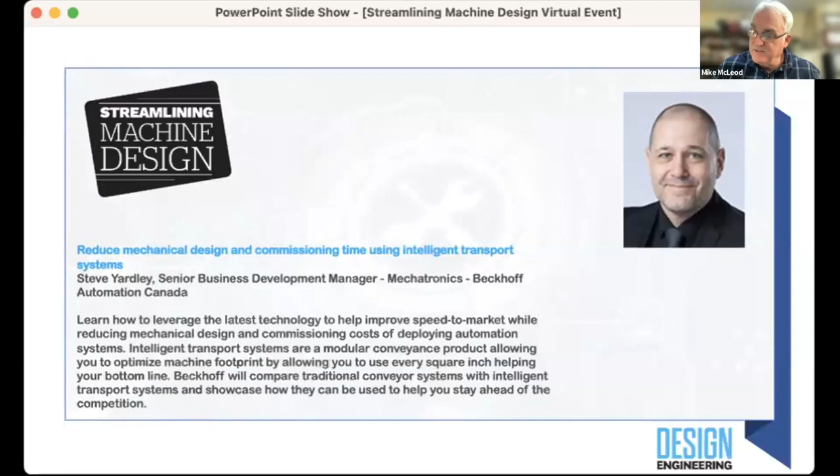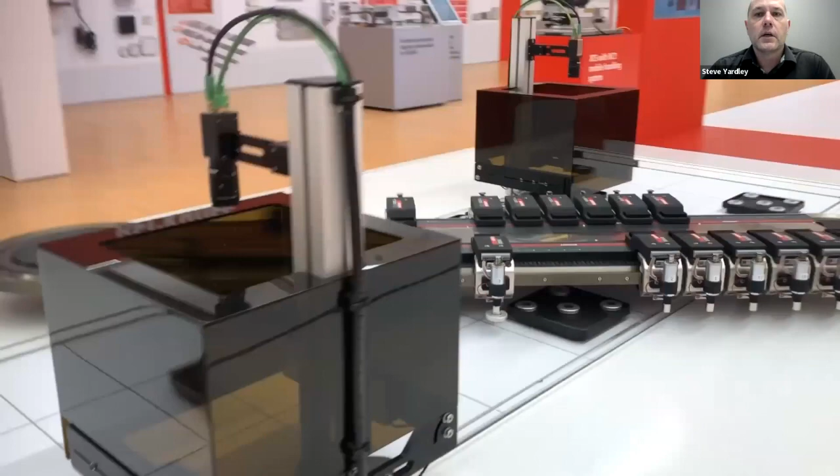Thanks, Mike and the design engineering team for the opportunity. My presentation will approach this topic in a slightly different way by looking at the specific technology and how this can help streamline the machine building process. By the end of this presentation, I hope to have provided some insight based on a number of real-world application examples. So let's begin.

As I mentioned, we're going to be talking about technology and how the next step in intelligent transportation systems, such as XTS from Beckhoff, can help streamline your overall process through design, build, commissioning, and qualification, reducing the time to revenue generation and production with the use of standard proven modules and assemblies, plus how to reduce some of the other challenges found in modern production. Let's start by looking at some of those challenges faced by manufacturing in 2023.

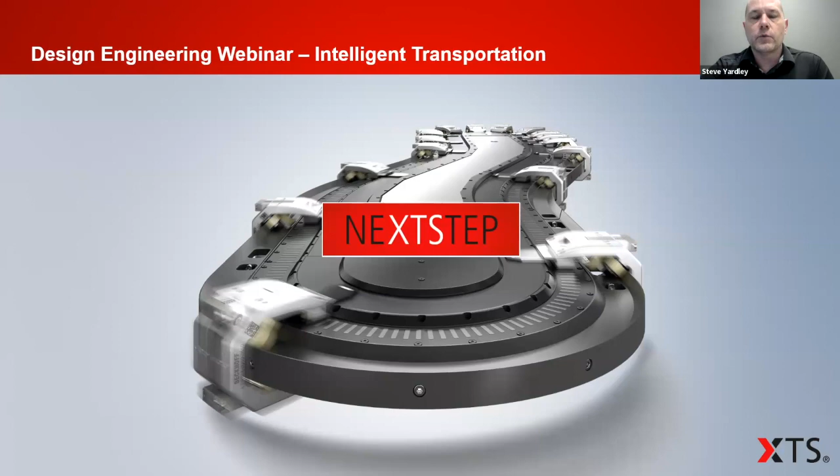Post-pandemic, there's been sustained growth in the manufacturing field. Momentum gained emerging from the pandemic has exceeded expectations, and we're seeing a number of different trends. Organizations understand the need to keep up with technology changes and are investing in advanced and emerging technologies to increase agility. Labor continues to be a huge challenge, finding ways to address the labor market to add and retain the right talent. Flexible automation is a key solution to the labor shortage, automating where practical.

Recent events have exposed weaknesses in our supply chains. Manufacturing is facing serious productivity challenges as organizations look to address the shortages, in some cases looking to reshoring and local or in-house production solutions. A topic really on trend is smart manufacturing, smart factory, intelligent transportation, the internet of things, and connectivity as the industry continues into Industry 4.0. End users recognize the enormous value of production quality and engineering data acquisition and analysis. A big change is that these end users often now take it upon themselves to undertake the R&D projects and feasibility studies prior to engaging machine builders.

So there are many challenges faced by all manufacturers in 2023. Manufacturers will see this as a critical year as they tackle global logistics backlogs and cost pressure, coupled with other concerns due to inflation and the uncertainty of the economy. This list is not exhaustive by any means, but a snapshot of some of the key areas where effective use of advanced and emerging technologies can make a big impact. My goal here today is to demonstrate how deploying intelligent track systems can help solve some of these challenges.

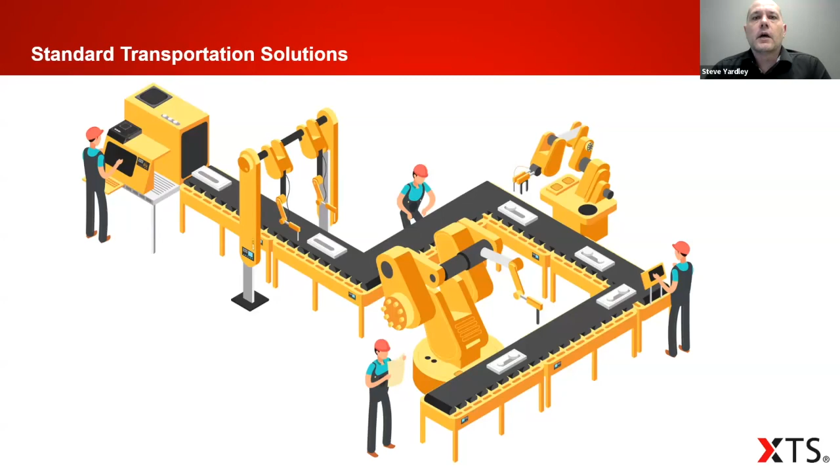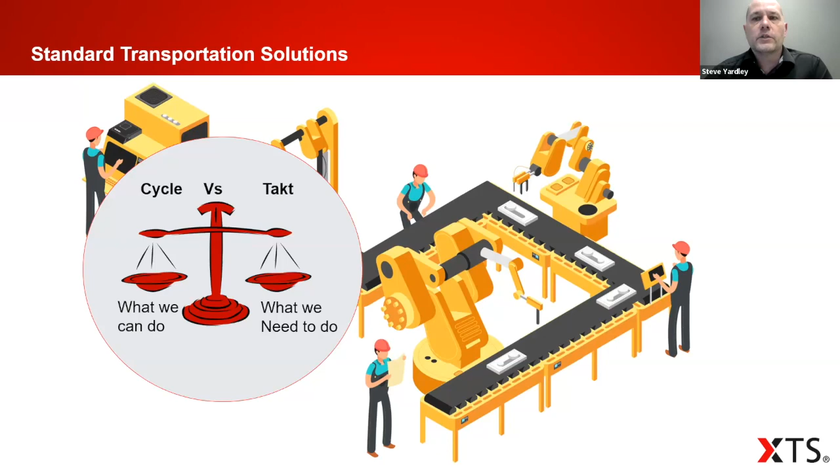Typically, the bottleneck is the transportation solution, limited by the best cycle time that can be achieved by using the technology and the process time combined, rather than the takt time, which is more important as it's driven by the customer demand. In many cases, the reason for the focus on cycle time is due to the time it takes to transfer the part between the stations and locate it, rather than the value-added process itself.

Cycle time is determined by the process, what can be produced in the given time, plus how long it takes to change over the product, which in many cases is increased due to the limitation of the transportation solution selected. Whereas takt time is based on producing what the customer demands within a given time.

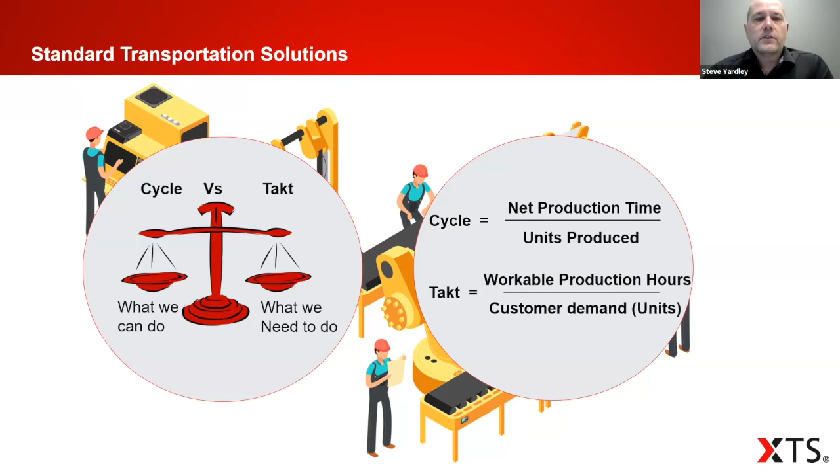To balance cycle and achieve takt in many cases, multiple additional fixtures on a traditional solution are needed. So more tooling, heavier weights, and larger footprints can be the result, meaning more floor space, more automation, more work in progress, more overall cost. By selecting an intelligent transportation solution, however, the time between stations and processing can be optimized so you're not limited by the slowest process.

And there are many forms of transportation to choose from that can be used in manufacturing: dial tables, precision link conveyors, pallet-based systems, plastic chain conveyors, walking beams, and so on. Each of these solutions has its application, but they're very limiting. A dial table, for example, is a fixed process time, one direction, with the slowest process setting the cycle rate.

For a modular pallet-based conveyor, the largest challenge is the time it takes to move from one station to the next via different space and time consuming transitions. Then the need to stop and position the part prior to the processing operation beginning. This is all taking up valuable time and space.

Each one of these solutions takes time and effort to build and integrate. Both mechanical and electrical design is needed, and in many cases, additional components such as sensors and valves must be added, which someone must figure out how to mount and how to control. This diagram really sums it up. No matter how fast the robots or operators or automation, the limitation is the transportation solution.

Traditional solutions often come with traditional problems, but many organizations continue down this path as this is what they've always done. These are the most dangerous words in manufacturing: we've always done it this way. Utilizing new technology such as intelligent transportation systems is the future of manufacturing, the ability to rapidly deploy, adapt to changes in production, volumes, variants, etc., while ensuring maximum OEE with minimum impact on the floor.

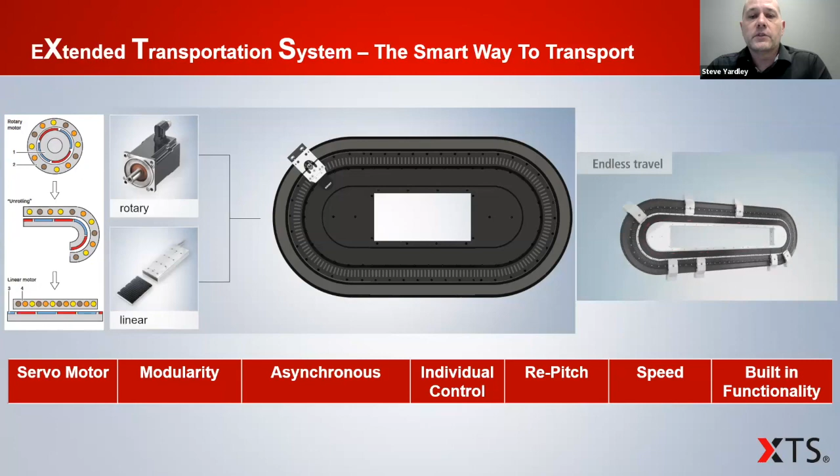Finally, having available built-in software functionality such as collision avoidance, jerk reduction, automatic accumulation, various motion profiles, easy connectivity via the industrial PC for all major interfaces, insightful diagnostics, simulation capability and visualization simplifies control design, meaning custom code is not needed for these functions. There's a lot of benefits to be had from this one piece of the automation puzzle. Utilizing better automation will allow you to build better automation solutions and help to simplify the overall investment and implementation time.

Making a comparison between synchronous and asynchronous motion. Dial tables generally operate in a synchronous motion. Stations on a dial must be at a fixed pitch, fixed speed, fixed direction. This means that the overall cycle time is driven by the slowest process. If you multiply the slow stations to aid cycle time reduction, then the knock-on effect is each set of tooling must pass through each station and wait whether it needs to be worked on or not for the duration of the cycle time. This can also mean unneeded additional tooling, duplicate stations, blank stations, extra floor space, extra cost.

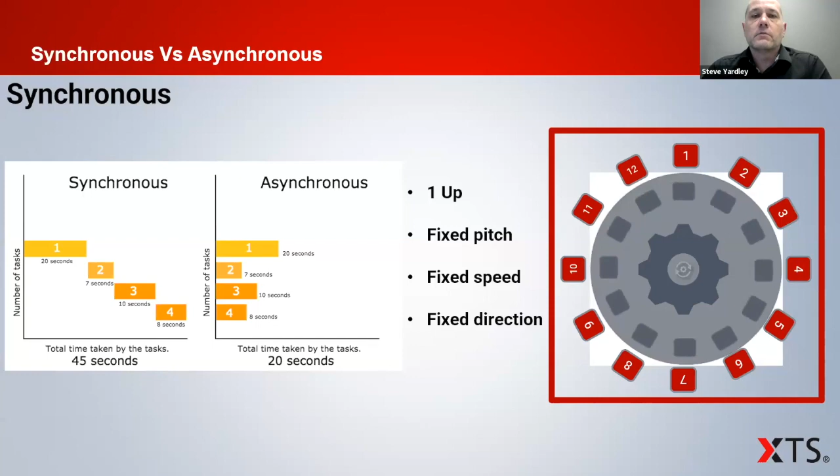Asynchronous motion enables higher throughput and flexibility. Intelligent transportation systems can operate asynchronously, synchronously, or a combination of both, which is determined by the application process. Here we can see where the solution was realized by utilizing the mover's individual control and ability to repitch as required by the process. So going from 1 up to 2 up to 5 up, and then back to similar pitch sizes as dictated by the process and the cycle time requirement.

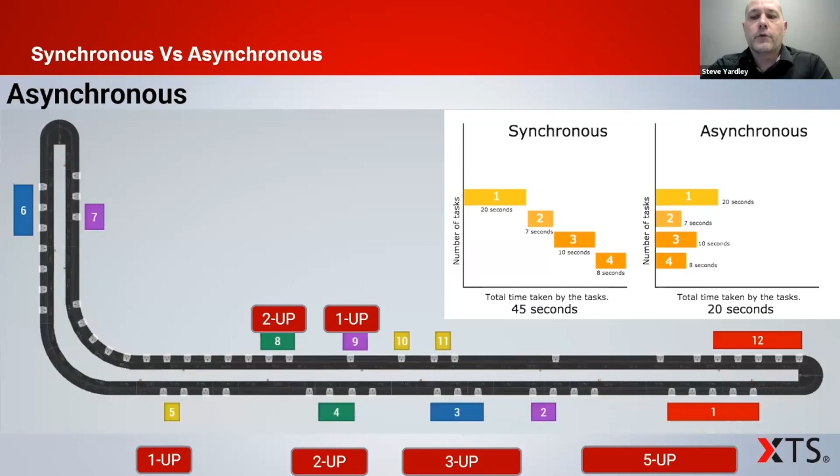Servo motion allows full configuration of velocity and acceleration. High velocity and acceleration means reduced transportation time, while low acceleration can help for sensitive and unstable or fluid parts. Low acceleration and low velocity could be used for a curing station, for example. This enables high overall machine throughput.

All of these capabilities and features allow huge reductions in custom engineering, design, and custom code writing, allowing the specialists on the team to concentrate on the areas where their skills for creating custom equipment are best used, rather than on the basics of transportation, which is used to connect these islands of automation.

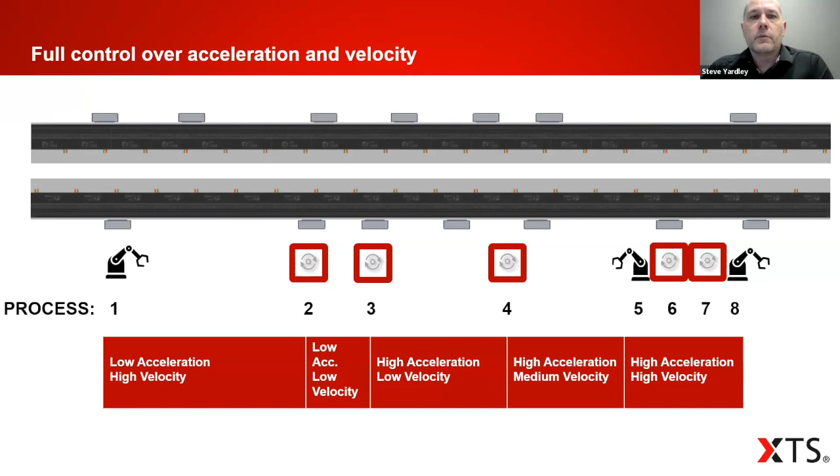The bidirectional nature of a servo motor allows not only for speed and acceleration control, but also direction. So you're free to use the mover as an additional axis, saving on automation and complexity cost. An example here, a print head. Having the ability to send the mover backwards and forwards allowed this customer to define the exact number of passes required in this printing process.

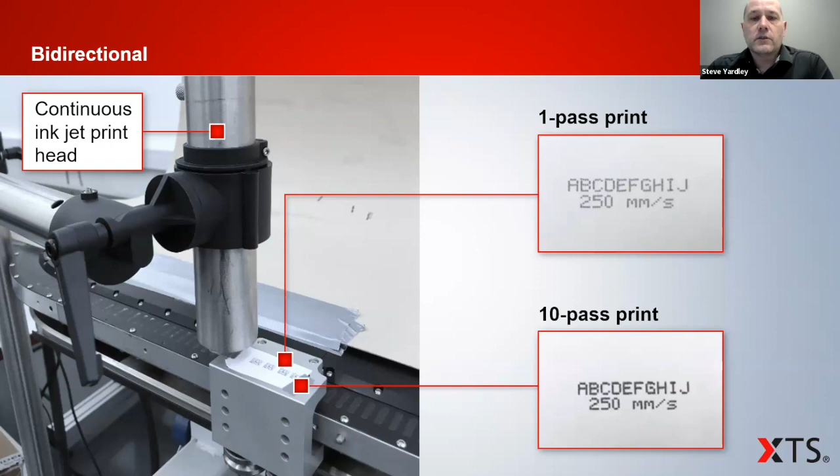This was only using the feedback from the XTS system. No additional reference measuring system was needed, nor were any additional servo axes required. This saved space and also capital cost.

So let's talk about floor space. There's a demand for production facilities to make a variety of different products and to switch between them more often. It's not typical to make tens of millions of the exact same product these days. Batch sizes are reducing, form factors are changing, packaging materials and methods are changing, and it's not practical or possible to build a new factory for every new product.

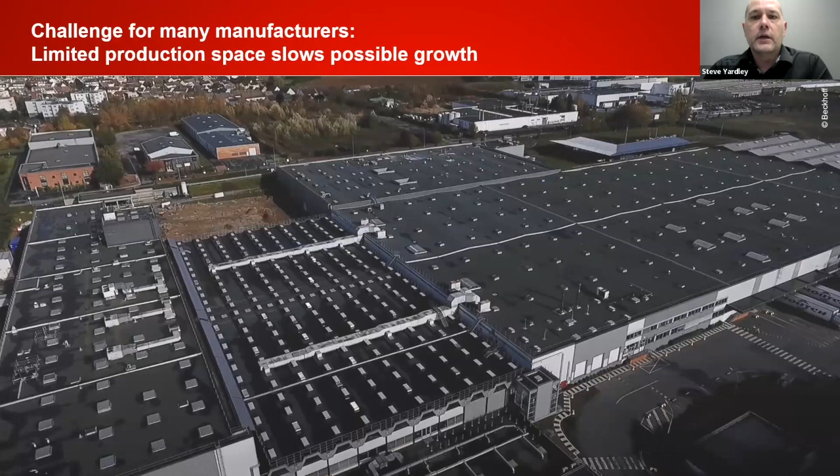Expanding production facilities is expensive and not always possible. Land purchasing, zoning, permitting, construction, it all costs time and money, and there may not even be any space to be able to expand. Getting more production out of existing factories is critical and a lot less expensive. With technologies like XTS, we can pack more production into a smaller space.

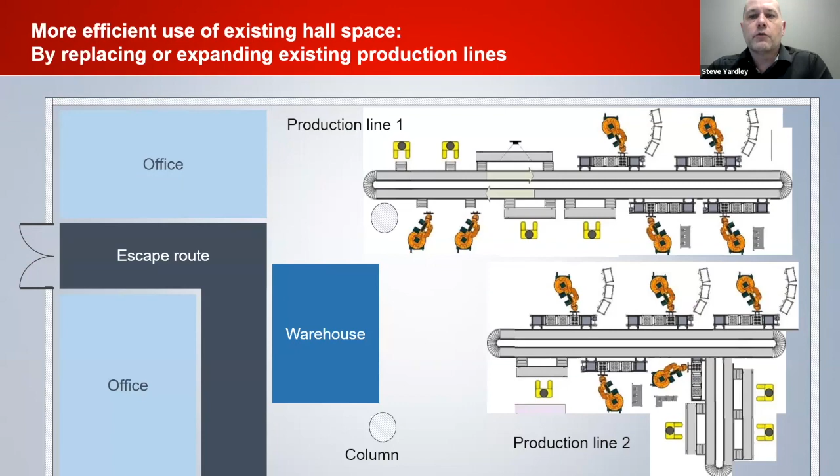We can look here at a use case. There was a need to expand the production capacity of an existing machine, but there were several hindrances: warehouses, pillars, escape routes, things that either can't or are difficult to move. A more efficient new machine was sought to give more flexibility, having the ability to produce different product formats with one system and to increase throughput. This would give the end user an increase in revenue per square meter.

Buildings often become a challenge when installing new equipment. Traditional solutions used up way too much floor space, had too much wasted motion, and weren't flexible enough for the customer needs. Having a transportation system with modular building blocks for straights and curves with inside and outside geometries offers huge flexibility of layouts, ensuring any challenging features such as the building columns can be designed around and the available space maximized.

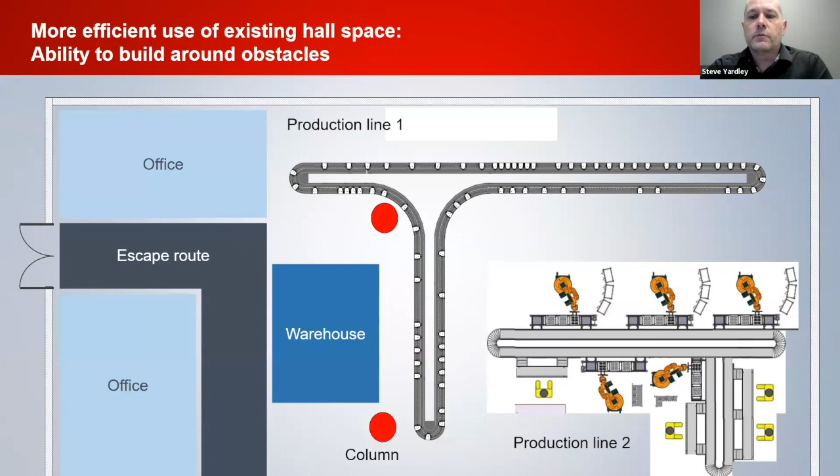For example, the products being produced may be similar in design, but with some slight differences or customization. So variant 1 must pass through all stations. Variant 2 only needs to visit 7 of the 10 stations, and so on. It's possible to have these different variants running on the line at the same time and not impact the functionality, giving the customer maximum production flexibility, enabling them to use their capacity as desired.

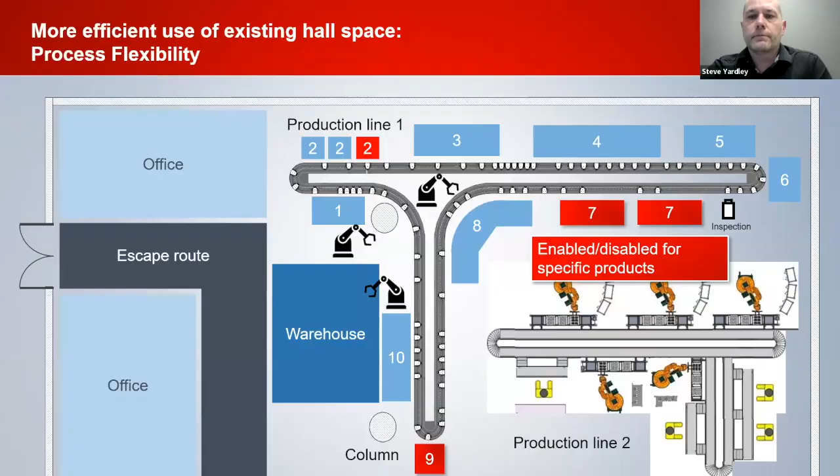Let's look at a customer example and installation. Geffersoft makes diffusers for airbags, a safety critical part for your vehicle. They deployed an XTS for optical inspection. This optical camera inspection is slow. 11 individual processing stations examine these critical parts down to the micrometer level.

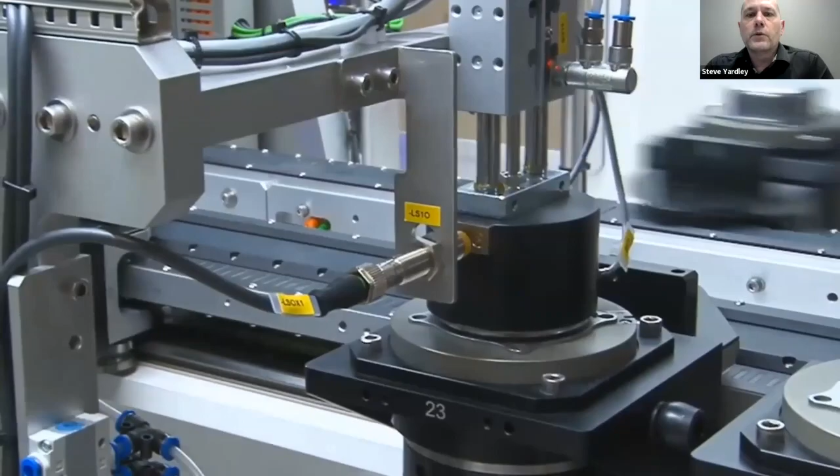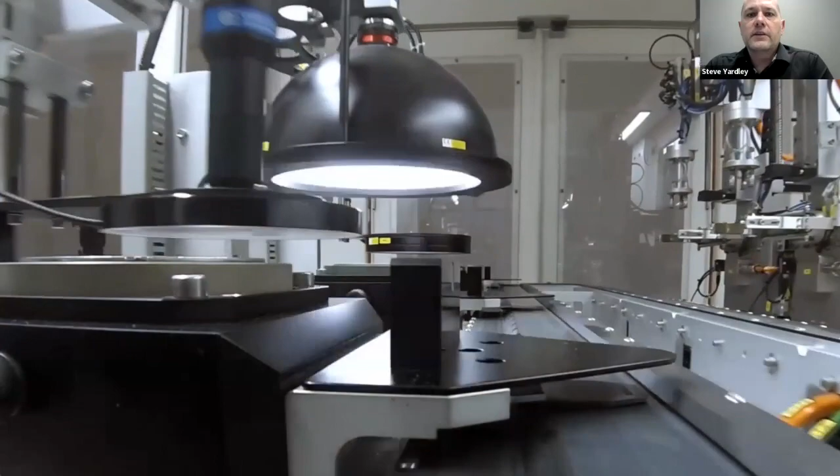Individual motion of the movers allows for multiple individual test processes to happen in parallel, meaning the throughput is no longer determined by the time-intensive optical process, so the faster test stations can be used sequentially, allowing optimal utilization of the assets. As a result, the 2-second cycle time requested by the customer is reduced.

The optimization of the stations also enabled a reduction in stations needed, so the machine acquisition cost and floor space were both reduced as a result. In this case, the floor space was reduced by 40%.

The high speed and position accuracy of the XTS system even allowed for some additional capacity to be available, which can be used for future expansion for any additional inspection tests or to further reduce the cycle time, therefore adding security to the investment made.

A modular system will allow mechanical designers to create the layout demanded by the application environment, not by the limitations of the equipment. Not only do you have to consider each process, as we just saw, the available space and objects such as pillars impact layout. We've already observed a straight line doesn't always work. Having the ability to configure the track as you require based on the floor space is key.

XTS is a great example of this, using a small number of modules to build up your system, starting with the straight and curved modules with different rail solutions depending on payload, complete with matched movers. This solution is completed with an industrial PC utilizing TwinCAT. This control system, based on an IPC with simple connectivity, rounds out a user-friendly modular system.

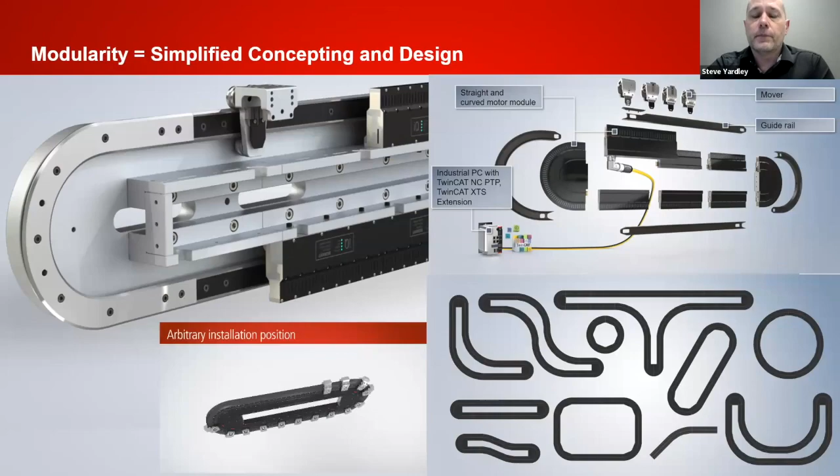Modularity and flexibility were two of the key aspects for L'Oréal selecting Beckhoff and the XTS system for their F24 production line, which was realized by French integrator SICAP. This line was used to produce over 55 different variants of foundation, having bottles of different types and shapes, plus having many different styles and colors of product. The ability to switch production in seconds based on the customer demand was critical. This system replaced 5 of the machines and gave floor space savings of over 30%.

L'Oréal, being an international organization with manufacturing globally, saw that the modularity and standard design from a proven solution available globally gave them the ability to replicate this in other countries to suit their local needs. This system was 22 meters long with 40 movers. It performed several different tasks, including bottle infeed, filling, attaching the pump, cap and label, with full transparency over the quality of the product. This solution fitted L'Oréal's vision of innovation and quality and increased their flexibility in production.

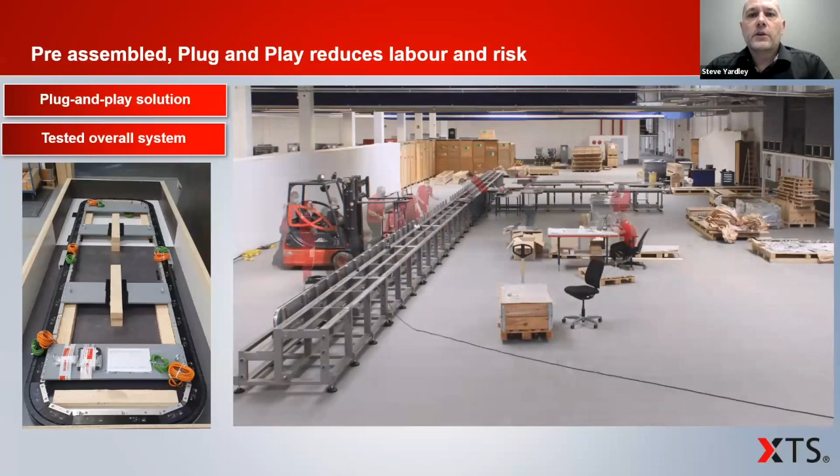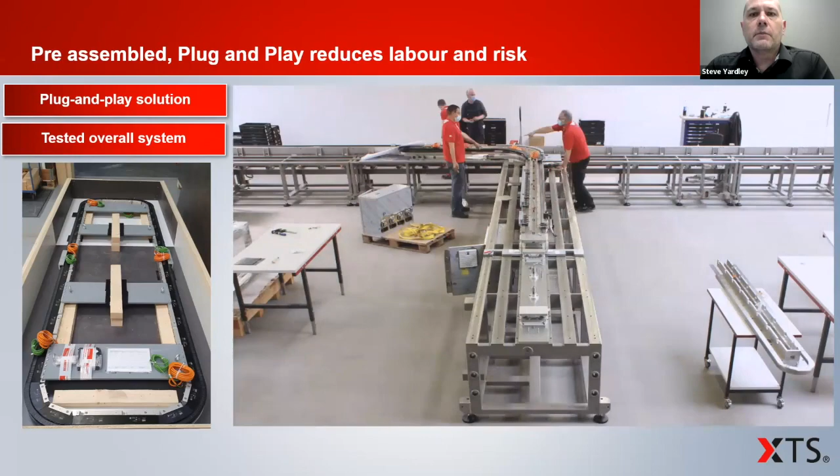Beckhoff then makes your life even easier. Taking time to understand your needs, we build on modularity with a proven plug-and-play solution which enables simple and fast project implementation. We pre-assemble and test this system for you, which then reduces potential sources of error and simplifies project coordination. Using this proven solution, which has been deployed more than 2,400 times in the last 10 years in a wide variety of industries, enables users to piggyback on the experience and risk reduction, given the ability to calculate costs thanks to an easy integrated overall solution. The benefit is that this allows you to utilize your labor and other resources in your specialized areas of expertise.

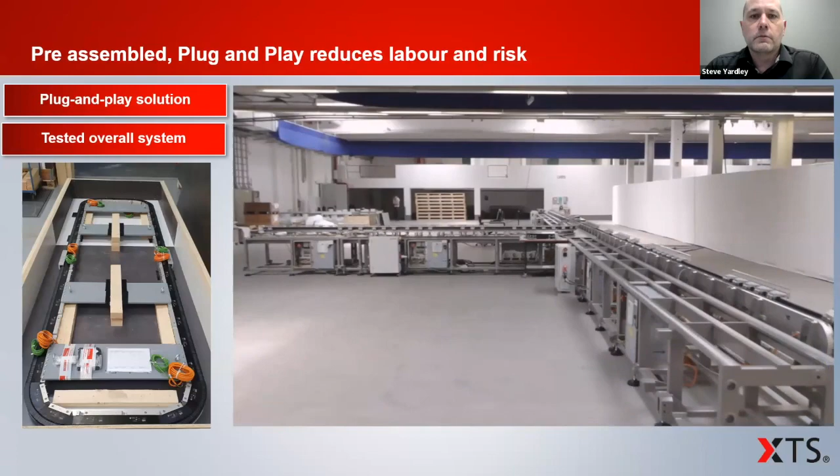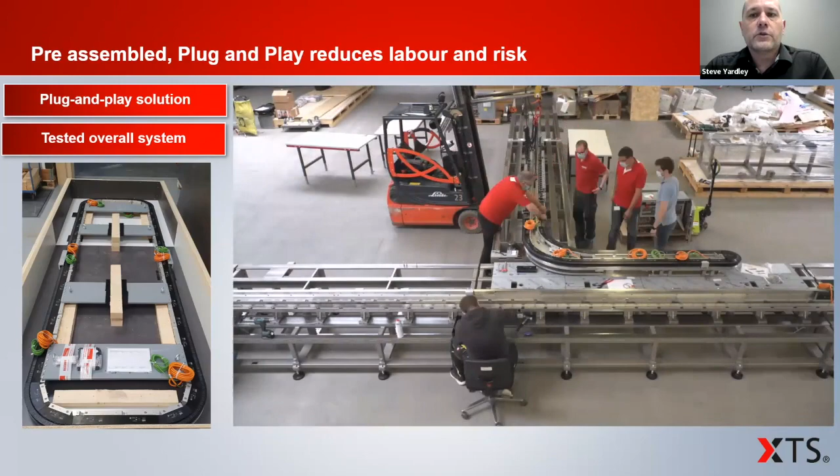Here we can see an example that was pre-assembled and tested for a customer in the pharmaceutical industry. It's a large system. This is only part of the entire line. One machine with 15 XTS systems and over 400 meters of track, complete with over 1,500 movers. The simple and fast project implementation reduced potential sources of error and allowed the customer to work in parallel on their custom automation. The customer provided the base frame structure details, which was designed around a combination of the transportation solution and overall machine design.

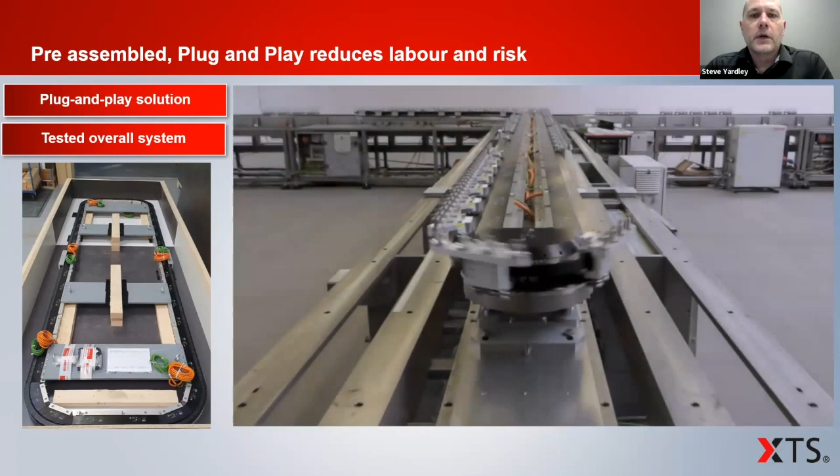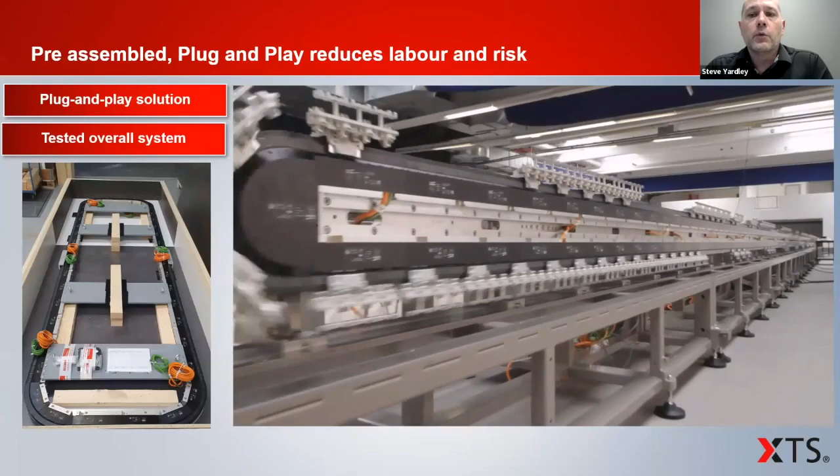Consultation ensured all shipping breaks were exactly as desired. Mechanical assembly, complete electrical cabinets, functional testing prior to shipment gave the customer the ability to work in parallel, knowing once the transportation system arrived, it would fit and function as expected, speeding up the overall implementation time.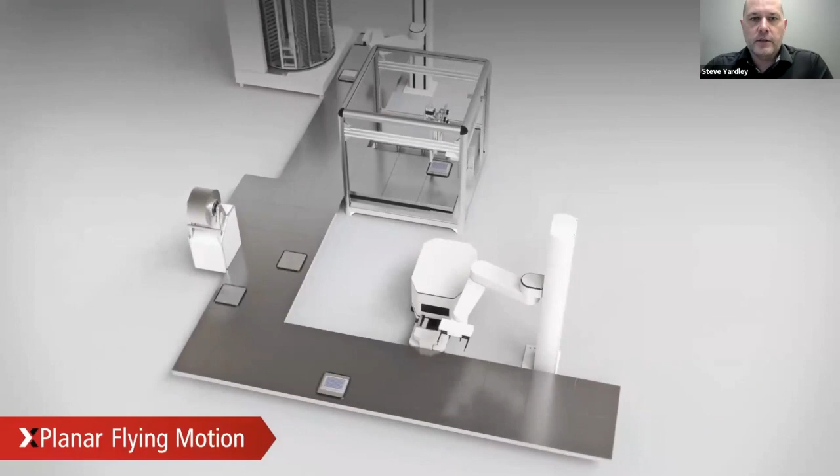Could it be even simpler? Of course. A modular concept with the ability to adapt quickly as manufacturing changes. Giving an organization ultimate agility, this concept uses the emerging technology of planar technology. Having 6 degrees of freedom and utilizing modular tiles that are used to create a path which the movers can travel on. Adaptation and alteration is quick and simple as needs change. Literally throw down tiles where you need the movers. It's simple. This is tomorrow's technology today.

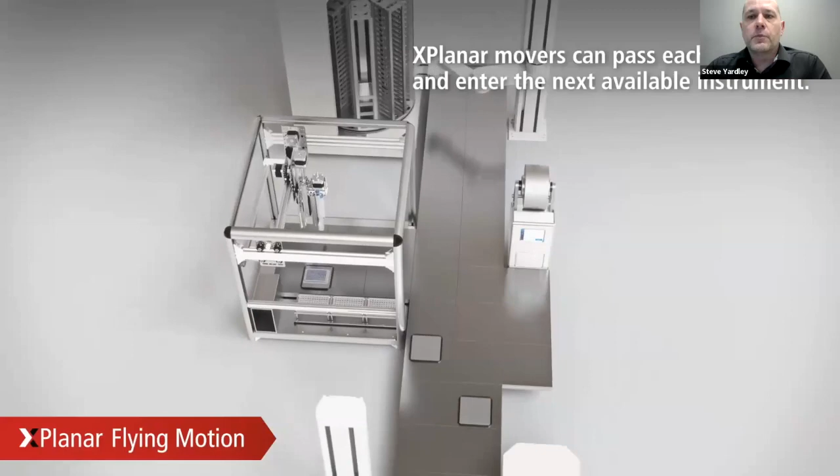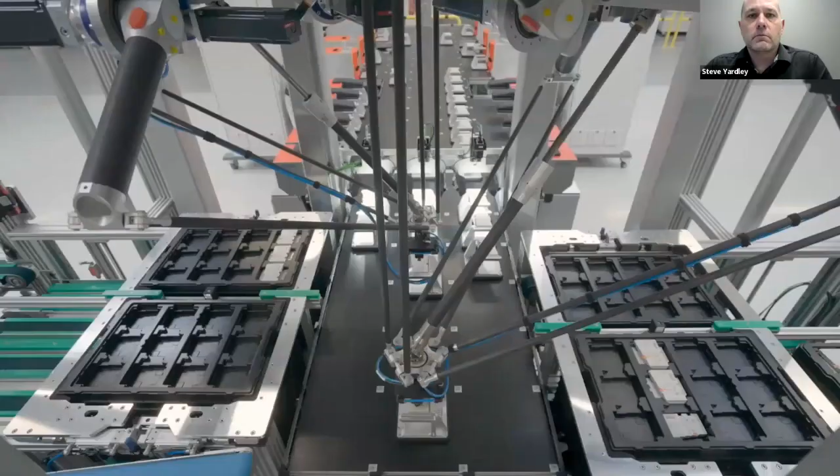And this isn't just futuristic technology. It's being used right now as part of our own production for bus terminals. This is part of a critical production process as these products make up a large percentage of Beckhoff's annual revenue. The XPlanar is used to link stations. Starting with picking from a tray, the camera identifies the serial number. The mover is then sent to the programming station and the specific program is flashed based on the serial number. It then goes directly to the test station.

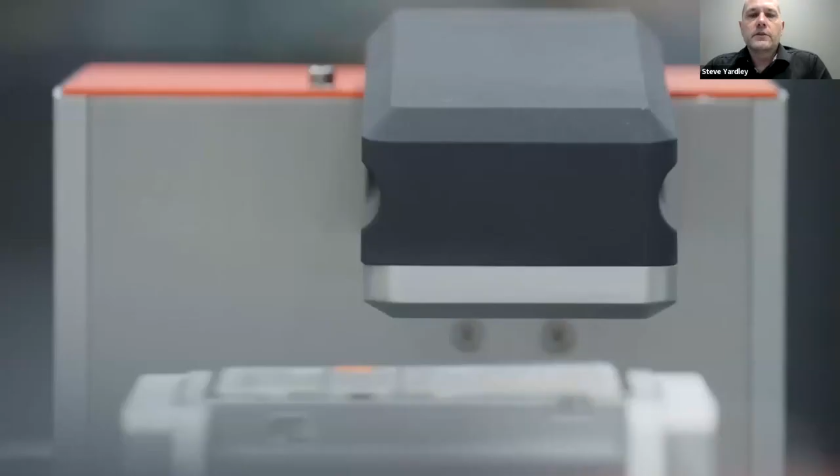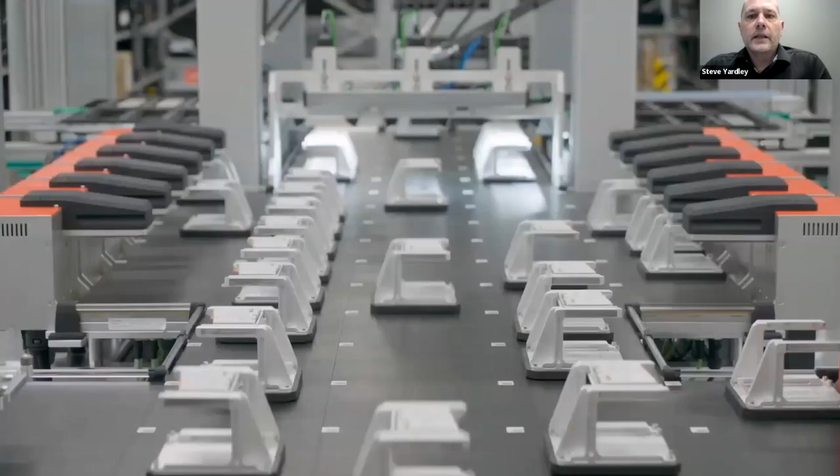The 2D movement allows decoupling of flow, so if a longer test cycle is required, it doesn't affect the other modules in production. Having 6 degrees of freedom, XPlanar replaces the need for additional handling units, such as when handing over to the test cell, the vertical movement of XPlanar performs this function, so an additional axis or robotic device is not required.

Let's talk about some digital tools and IoT on a really high level. Specifically for automation, digital twins can be used to improve production and process and are being used in all types of industries to help enhance complex projects. Digital twins, which are a digital representation of a physical object, are exceptionally helpful for simulating manufacturing lines in the development stage to help support development of production systems. This helps to shorten time to production, increase flexibility, aids optimization and performance improvement.

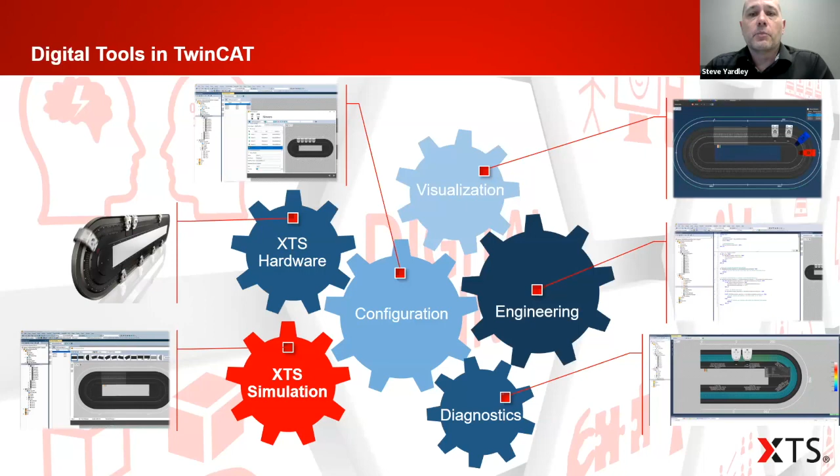For example, digital tools made available by Beckhoff's TwinCAT running on an industrial PC include project planning tools, which allow you to check many issues without a single piece of hardware: sequential control, power consumption, production rates, bottlenecks, and so much more. Integrated XTS simulation functions also facilitate plant design. They enable the user to assemble any desired track layout from the XTS modular system, to check the subsequent integration into plant concepts, and to verify application sequences.

During the development process, all parameters such as track layout and number of movers can be adjusted as desired until the optimal solution is obtained. The generated program code can then be reused for the physical hardware. This significantly speeds up the plant design, configuration, commissioning, and reduces the time to market. This is an example of how Beckhoff simplifies the project planning of XTS applications with a software toolkit already included with a range of functions.

A tool window summarizes all components in a clear display and is the central point for the user to be able to complete all the different functions. Using the configurator and software builder, the user is guided through the setup of parameters for the application with visual support. After only a few minutes, you can see the movers starting to go around the system, either on the hardware or in simulation itself.

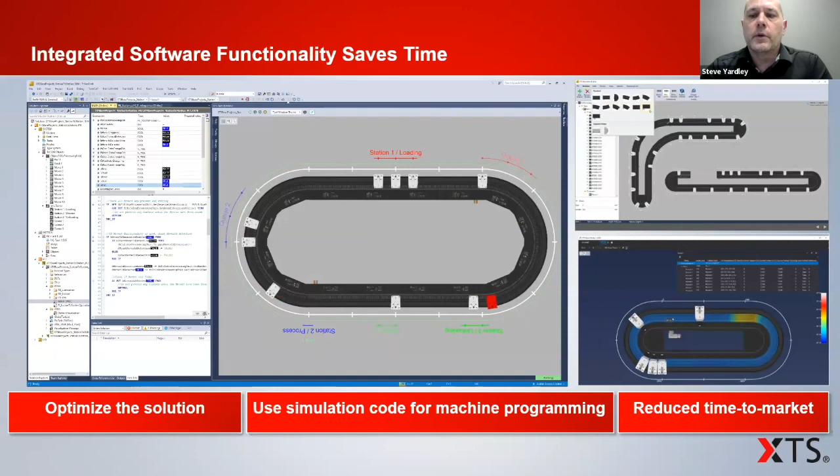Having an industrial PC-based control offers several benefits, such as reduction of cabinet space, typically by 50%, less panel space by 40%, and less cabling is needed with deployment of Beckhoff's IPCs with EtherCAT. There's a reduction of integration time, debugging, reduced complexity, and reduction of labor doing repetitive tasks. Everything is designed for reduction, either in physical space or time to design, assemble, and debug.

This simplifies the integration of PLC, motion, HMI, safety, measurement, vision, and IoT, all by using one software on one CPU. There are many options of IPC to suit the application based on the complexity and how many cores are required, with the options of embedded, panel PCs, or HMIs. Being a PC, all interfaces are available for additional ease of integration and connectivity, such as EtherCAT and Ethernet. PC-based control means data is available centrally, such as diagnostics and predictive maintenance, giving real-time coupling between the process and hardware. Being a PC, it certainly makes it easy to connect and address the IoT challenges.

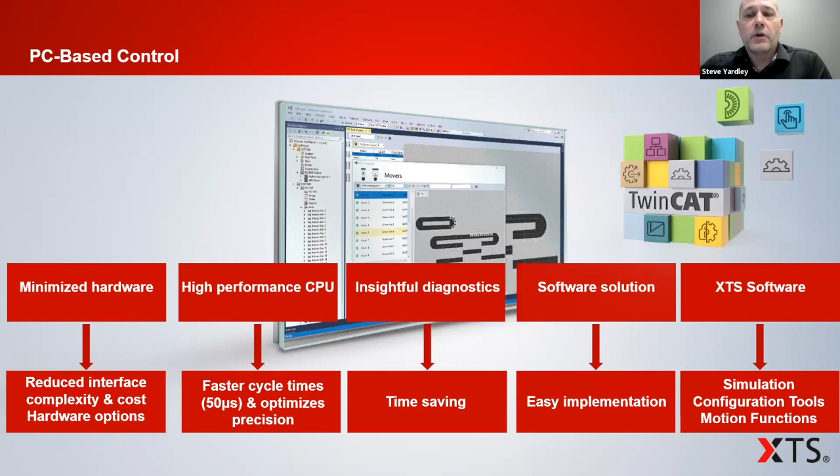So we've explored, by looking at some real-world examples, how intelligent track solutions can help with a number of these challenges. Labor is addressed in several ways. In design utilization, the modularity of the design and software functions, such as simulation and virtual commissioning, and then also for the end user through optimization of processes, help to ensure labor is deployed where it's best used. Floor space constraints are first addressed by using the building block modularity, fitting the solution to the available space and required automation, and then optimized once again with simulation, hitting production rates with the right sized solution.

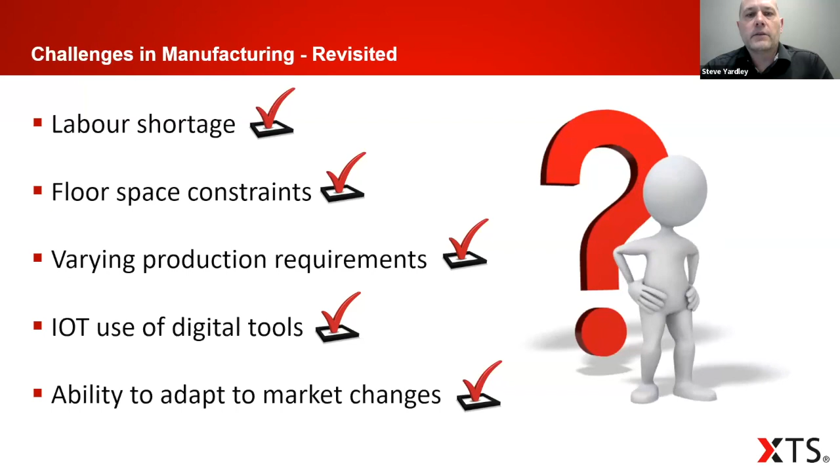Individual control and process flexibility allows the end user to customize their solution based on changing requirements. Correct selection and easy adaptation and connection of the right IoT tools for your organization and your end users make integration and diagnostics easy. Having a solution which is really easy to reconfigure both mechanically and with software ensures your end user's ability to pivot and be agile as the market demands. All of these help to solve a complex puzzle.

What you've seen in this brief presentation is an intelligent transportation solution that's fast, agile, modular, and flexible. As you've seen from the examples used in various industries such as life sciences, automotive, food and beverage, consumer packaging, delivering value to several of the challenges end users are facing. The sweet spot is, but not limited to, complex, high volume assembly with a wide mix of products and or a wide mix of processes.

These days, end users often take it upon themselves to undertake R&D projects and feasibility studies prior to engaging machine builders. This means in many cases, they're already exploring and understanding the benefits of intelligent transportation solutions directly. Utilizing this as a platform for your automation maximizes throughput while minimizing the impact on the factory floor. Production versatility and adaptability are key areas for a successful business model, and we're here to help you with that journey. We saw this earlier, and we have seen some great ways of how using intelligent track systems can increase efficiencies through this process.

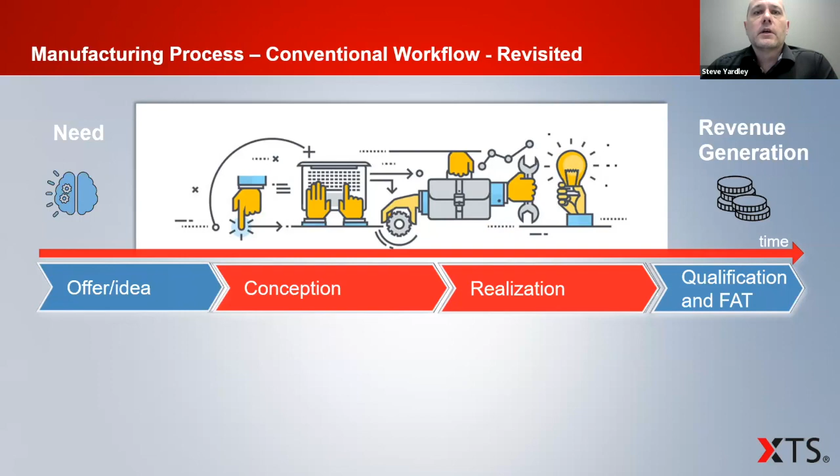More and more, we see the service life of machines getting shorter, faster to market being more important. So we have to find a way of shortening the phases in this process and allowing them to be worked on in parallel to reach revenue generation faster. As you've seen demonstrated here, using intelligent track systems increases efficiencies through all stages of this process. Understanding the manufacturing processes and impact of each one through simulation ensures optimization and will highlight any potential problem areas to address prior to deployment. These intelligent track systems are already a proven solution from a mechanical fit and finish through to electrical items and software.

It's already been done. It's a proven working solution, so debugging during commissioning is vastly reduced. Even during this phase, there are virtual commissioning tools and insightful diagnostics. Modern production requires modern solutions, and this is one solution. Employing evolving next generation technology with unique innovations and insightful tools to help with each stage: process reduction and cycle time reduction through individual shuttle control, being able to conduct the process in parallel with the standard building block design of the track system and digital tools within the control system.

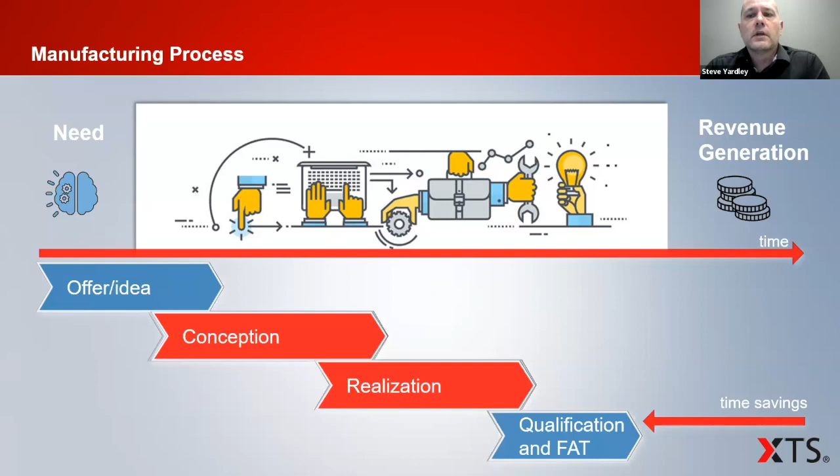Broader diversity of products means that some traditional manufacturing processes and solutions may not be the best way to secure the investment for future diversification. In today's environment, you need to ensure that you can be agile enough to adapt to the market and the customer changes, given security of your investment. Investment in the right technology solution, which is adaptable to varying products and volumes, gives clear return on investment.

So again, thank you, Design Engineering Magazine, for allowing Beckhoff this opportunity to share some thoughts on this topic. I hope the use cases have demonstrated how deploying intelligent transportation systems such as XTS from Beckhoff can benefit your operation and help not only improve your revenue, but also agility.

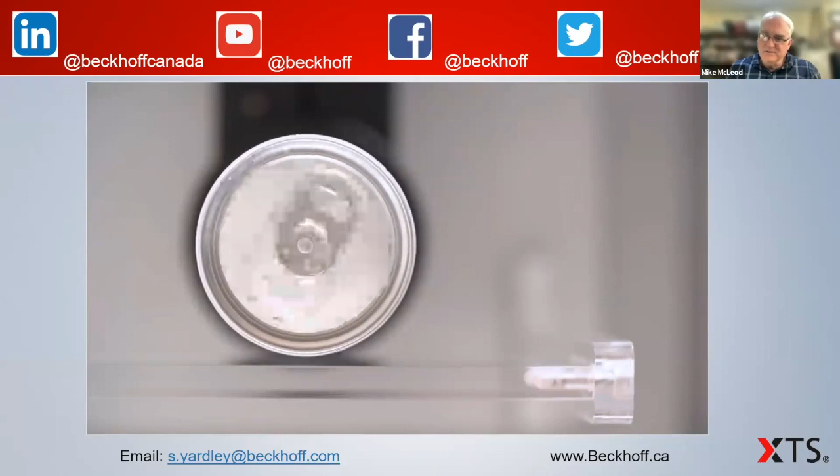That was great. I learn something new every time I hear or read or research this topic. Can you speak to how precise the individual movers are? Yeah, the repeatability is plus or minus 10 micron. Positioning accuracy is about plus or minus 0.15 millimeters. That's amazing. They're more like flat robots in a way that happen to move things from station to station. That's the way I've begun to think about them. It's a servo motor that's been unwound.

Yeah, that's the easiest way. So basically, you've got a servo motor. You've got all of the control aspects and flexibility that you would expect with a servo motor.

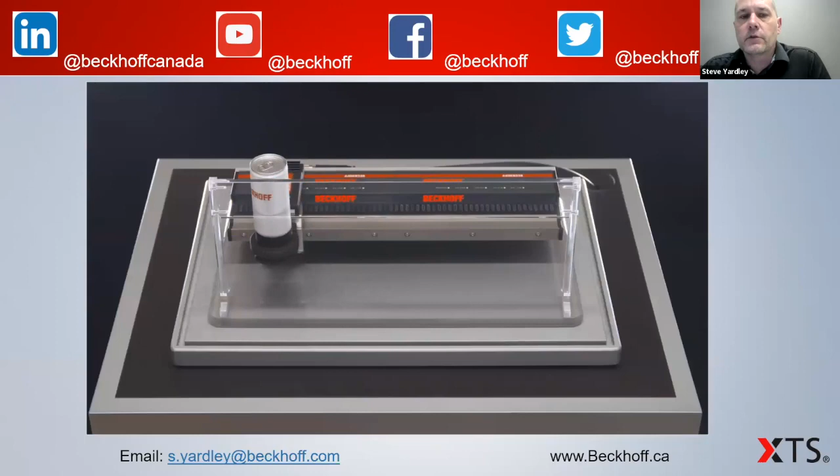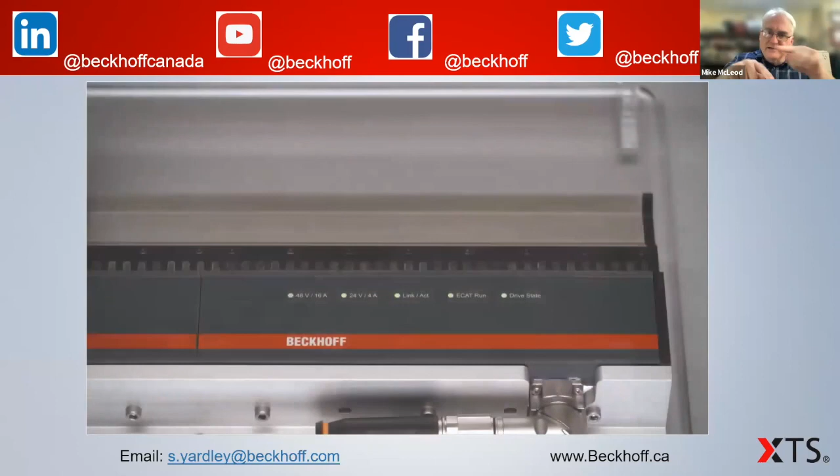Sure. All the demonstrations that you showed were single tracks in many different configurations, sometimes an oval, sometimes a circle, sometimes serpentine. Is there a way of having an A and a B sort of channel? Like, is there a way to have multiple routes through the same circuit, or to connect multiple circuits so that things can be diverted one path or another, depending?

You could definitely hand off products from one track to another, but in many cases, especially with how the products are designed these days, the products are similar to each other, right? So maybe it's just a slight difference. So in many cases, you can have that one example that I gave, where you've got say 10 stations, but product variant A only has to go through 8. Product variant B has to go through 6 stations, and so on. So basically, it just ignores the stations that it doesn't need to go through, and then can continue through that path.

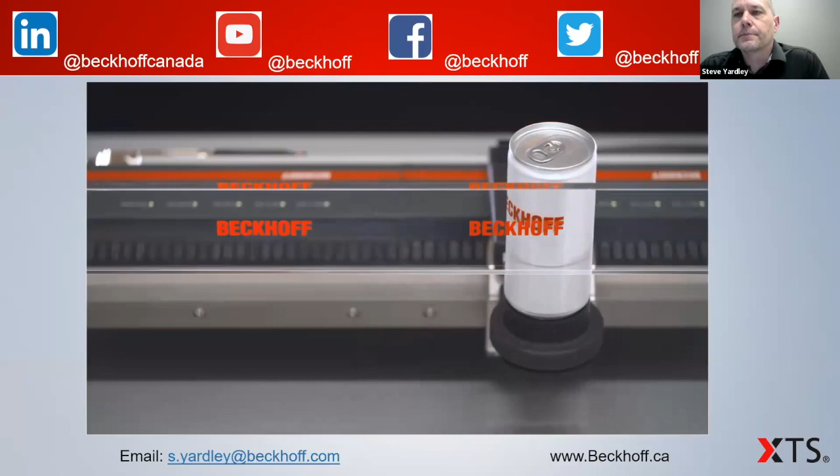But yeah, there's certainly another way, you can do a handoff, maybe by using an additional axis. Gotcha. And there are little elevators. Isn't there like a module that's like an elevator? Yeah, so we have a track management system as well. We work with HEPCO on the guide system, and we also have a track management system. So yeah, we can do multiple different lanes. Gotcha. Or different tracks and different orientations working in conjunction with each other.

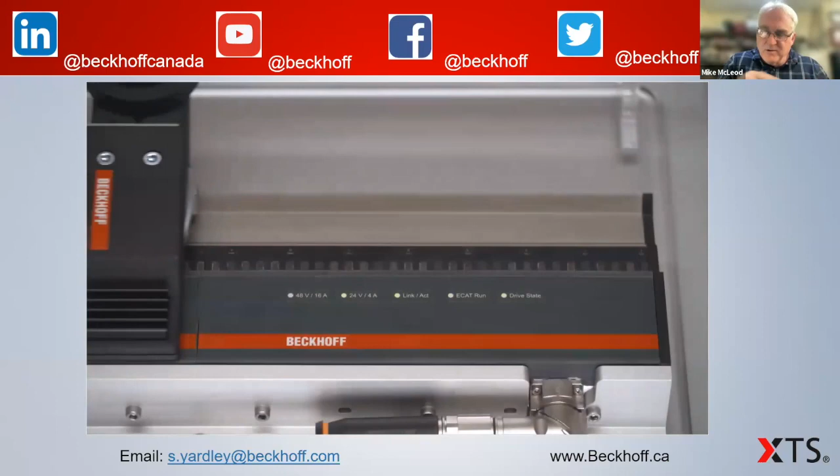Exactly. You showed how TwinCAT, or special software within it, handles programming the individual movers and how they'll work. But I think the really powerful part of this is how the conveyance system becomes part of the tooling almost, given that repeatability that you mentioned. How does it interface with the other stations? Like, I see how it's programmed within itself, but the coordinating motion between two?

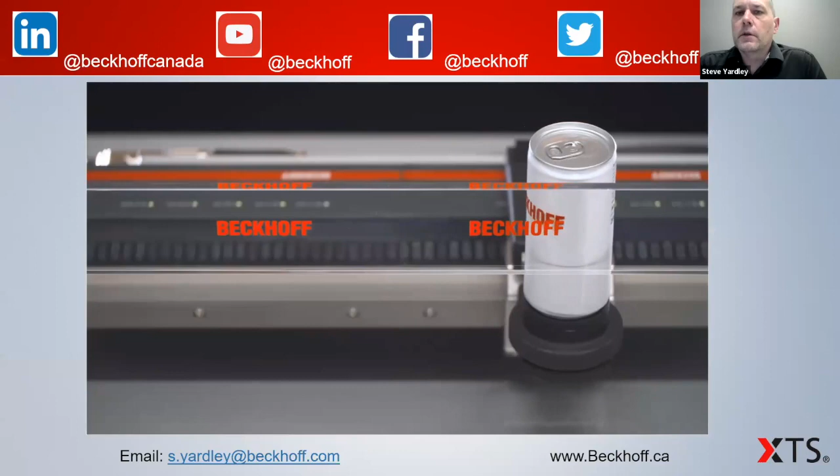The program is actually used. You can use that to control the whole system. So there's no need for any additional PLCs. Yeah, the IPC with TwinCAT on there, you've basically got an IPC with a PLC on there as well. So that can control the complete system. Whereas some of the other ones on the market, they have their own black box controller and then will interface to whoever else's PLC it might be. Here, there's an additional saving that you don't have to have that additional PLC. You've already got it with the system.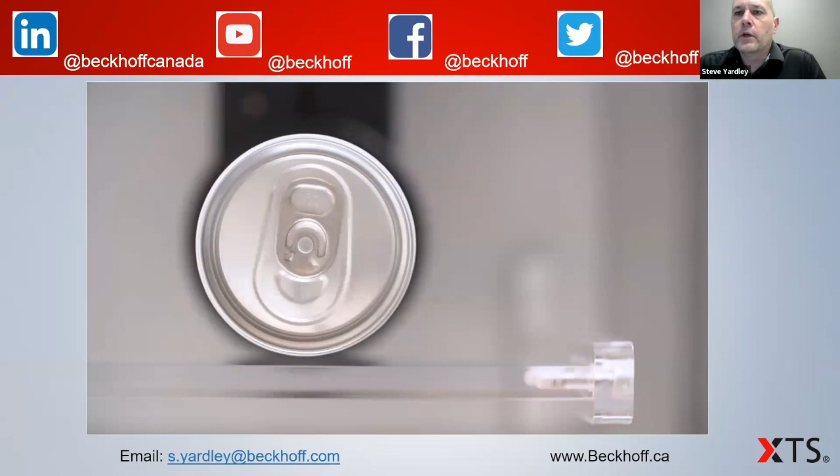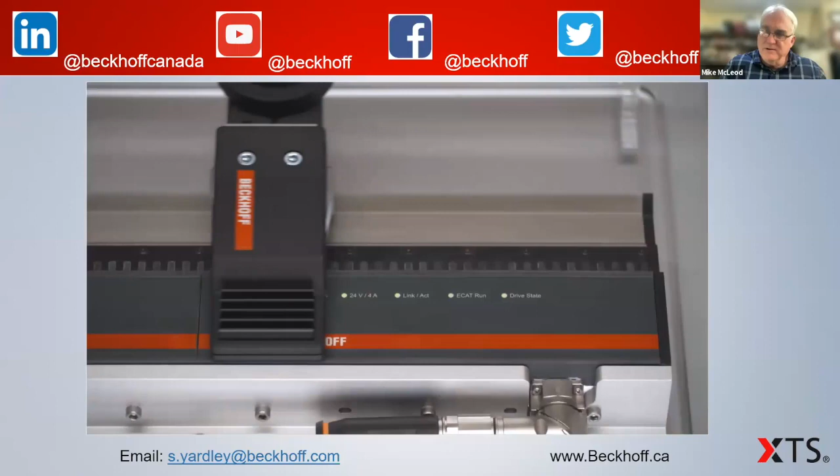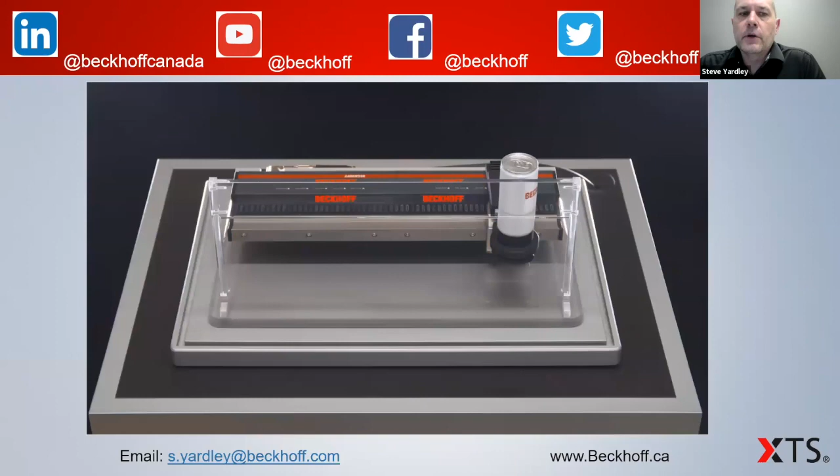Obviously, if somebody insists that they need a specific brand of PLC, that's also not a problem. We can communicate over all of the normal bus systems to be able to transfer the information. Gotcha. And I imagine being PC based, it exposes whatever information might be of interest for IoT integration stuff, that can go to a PLC and then up the stack as needed. Exactly. The easiest way to connect to IoT is by using a PC, right? So when your control system is based on an industrial PC, Beckhoff has been basically doing IoT since 1980, right?

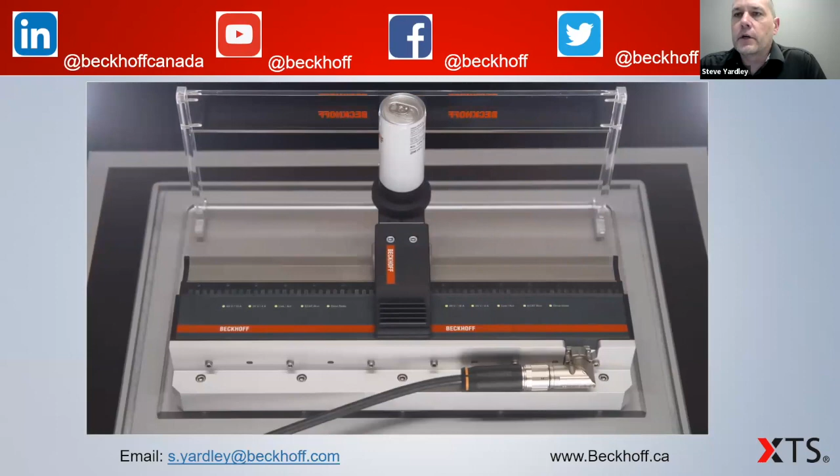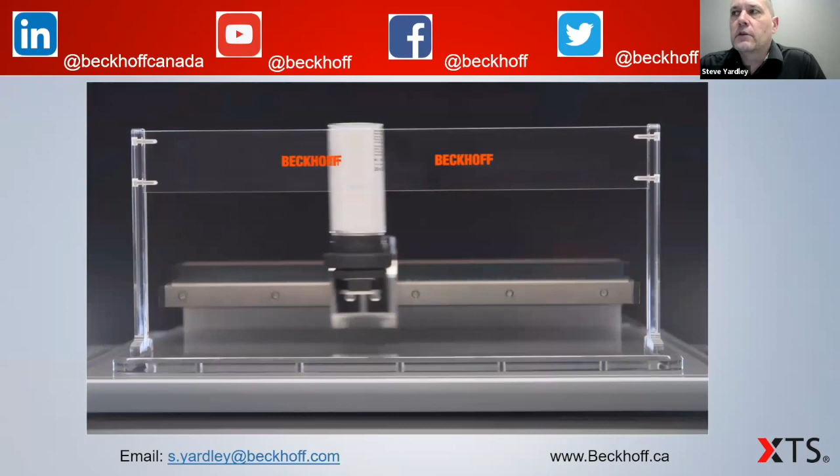Can you talk a little bit about No Cable Technology? How does that integrate? Is that a new thing? Yeah, that's a new product which we're hoping will be released by the end of the year, which is playing on the screen right now. So it's the ability to basically have some sort of power on the mover itself, whether that be vacuum or electrical, etc., without having to have any cables connected to it. So it's going to really revolutionize the way that people can do applications. Okay. Just so I understand, the power is done wirelessly? Yes. Correct, yeah. Okay.

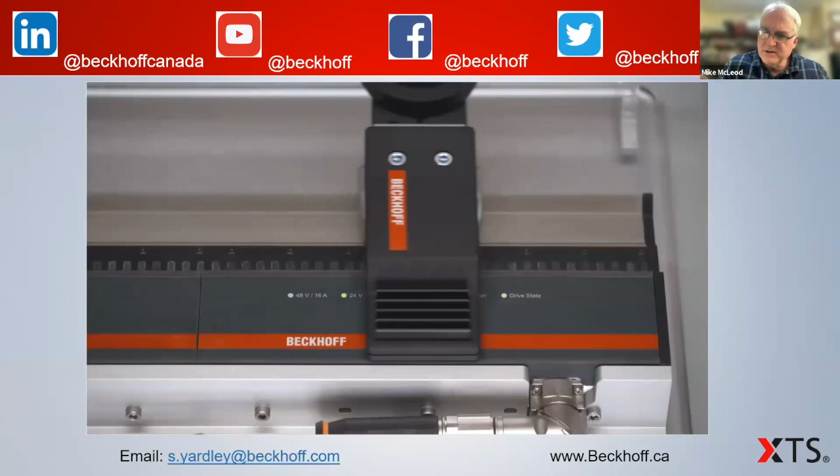Great. And there are multiple variants, right? There's a black version and there's a stainless steel version, and depending on the application, we have a couple of different guide systems depending on the payload. But then we also have a clean version of the system as well, so we can go to IP69K. So we can go into some of the washdown versions of the system too.